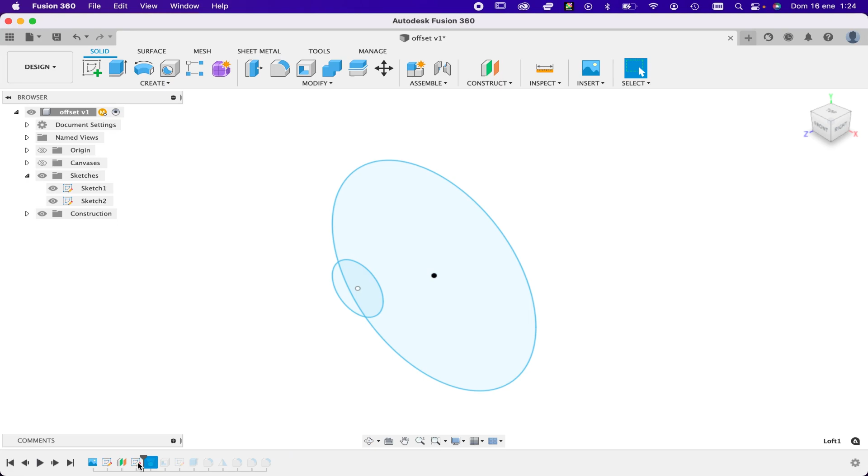I am going to show you the process of how to design a jewelry piece from start to finish. Together, we are going to create a 3D pendant using parametric computer design software. If you would like to follow along, first, you will need to install Autodesk Fusion 360 in your computer from the Autodesk website. I will be using Fusion 360 because, compared to other similar CAD software, I believe that it is relatively easy to use once one has some basic understanding of the program's different menus and tools.

Ideally, you should be familiar with basic technical drawing concepts, but I will try to keep the tutorial as simple as possible, so anybody can comfortably keep up by pausing the video when required. So, without any further ado, let's get started.

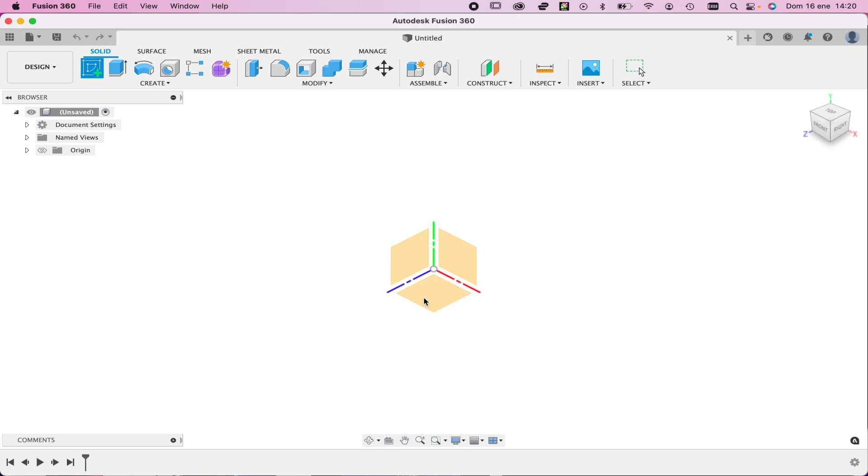When you first open Fusion 360, you find that the different program's capabilities are logically grouped into purpose-driven workspaces. Essentially, we will create a 2D sketch in a parametric canvas, using the tools contained in the Sketch Contextual tab, and then, we will extrude the final resulting geometry. The term parametric meaning that our shape will have a value for each dimension.

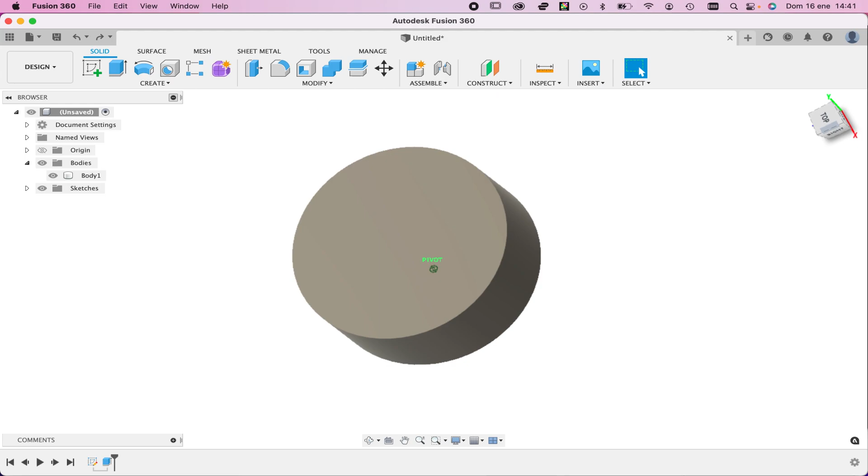Initially, we are presented with a bird's eye view of the canvas, just as if we were about to draw on a sheet of paper. But, Fusion is a 3D program, and we can always orbit in the 3D space by left-clicking and dragging the view cube located on the upper right side of the canvas.

Now, let's go briefly away from Fusion. All 3D designs usually start with a 2D sketch drawn on paper. However, I will stay completely digital, and I will use the Procreate app to roughly sketch my jewelry design idea on an iPad Pro. Cool, now we can import our sketch into Fusion as a reference for our design.

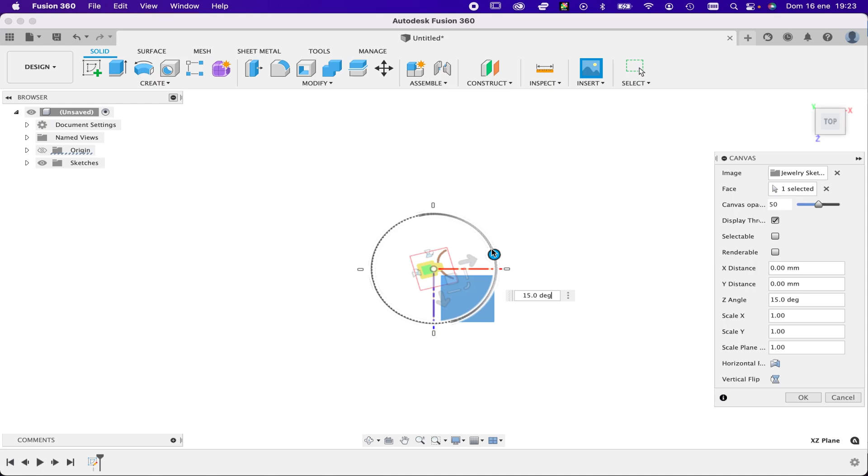Under the Insert drop-down menu, first, we select Canvas, then, Insert from my computer, and finally we look for our drawing in the location where we previously had stored it. Once our drawing appears on the canvas, we must stick it to one of the three reference planes and rotate it to be upright, so it looks much better.

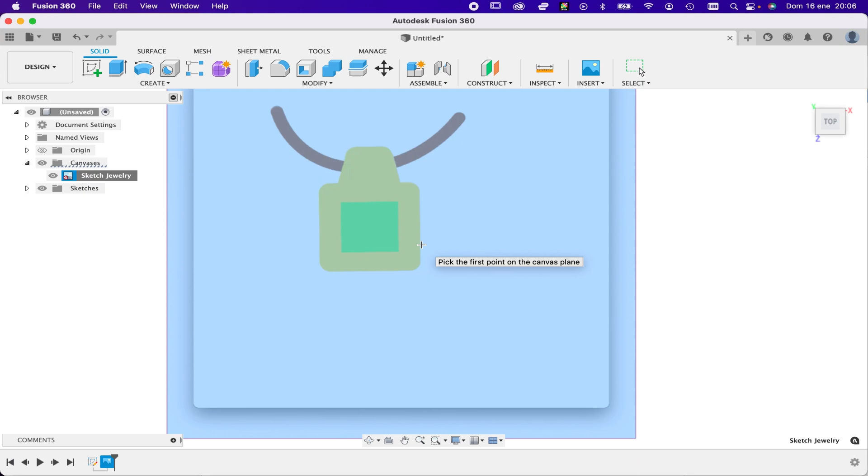Next, we are going to calibrate our drawing, so once we are ready to start building lines, each one of them will be an exact mathematical replica of our original design. On the browser, at the left of the screen, we need to look for the reference file that we just uploaded a while ago and right-click on it, to reveal the Calibrate option in the drop-down menu.

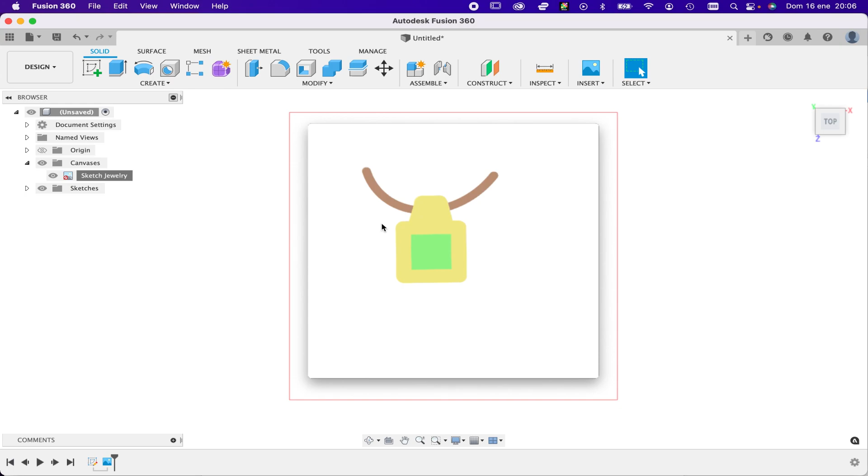You can zoom in as much as you like, to help you place the two crosses precisely on both ends of your drawing. We only must type the desired length of the piece in millimeters, which in our case is 25. I am not happy with the placement of my reference drawing, so I am going to revisit the browser, and this time edit the image, sliding it to the center of the canvas.

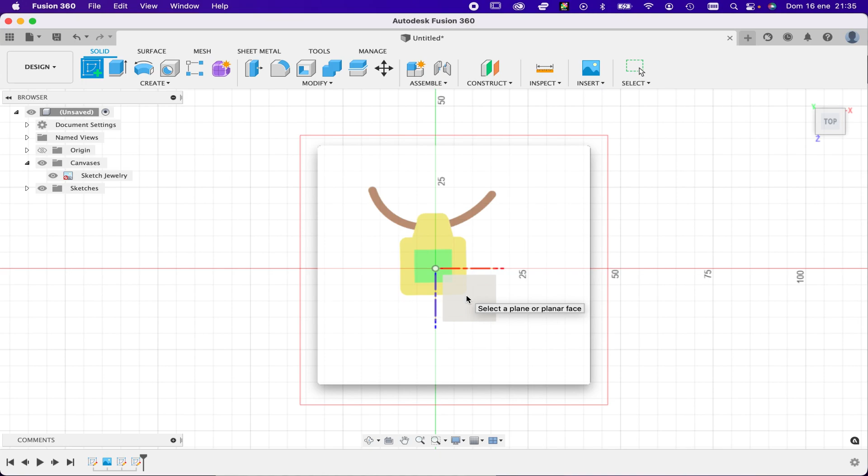Finally, we are ready to start our sketch in Fusion. We click on the Create menu and click again on Create Sketch from the drop-down menu. Next, we need to select the plane which is oriented in the same way as our reference drawing, which incidentally happens to be the XZ plane.

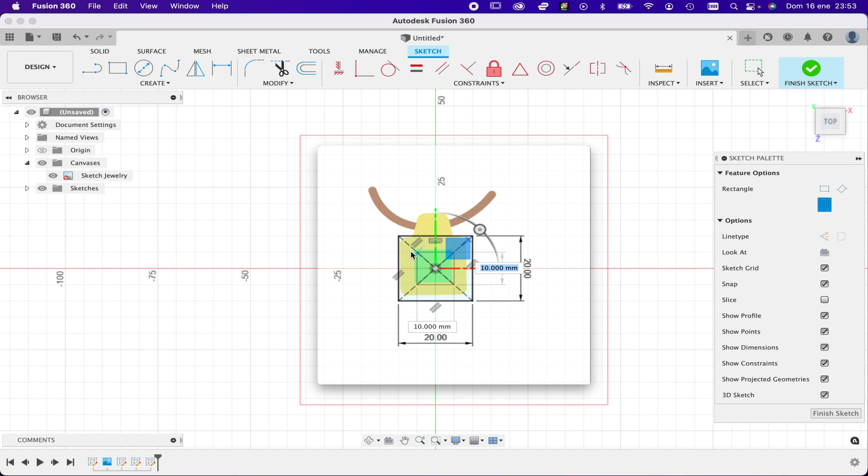We select the Rectangle tool, and the center rectangle. We click on the center of the canvas and drag until we see forming a 20 mm perfect square. We press the Enter key to accept the square. Now, to complete the frame, we must repeat the previous operation. Although, this time, creating a 10 mm square.

Next, we will select the Line tool from the Create menu and we will draw a vertical line from the center of the canvas of any length. Press Enter to accept the line and right away click on it, to select it. With the vertical line selected, press the X key to transform it into a construction dashed line that soon will be our symmetry line.

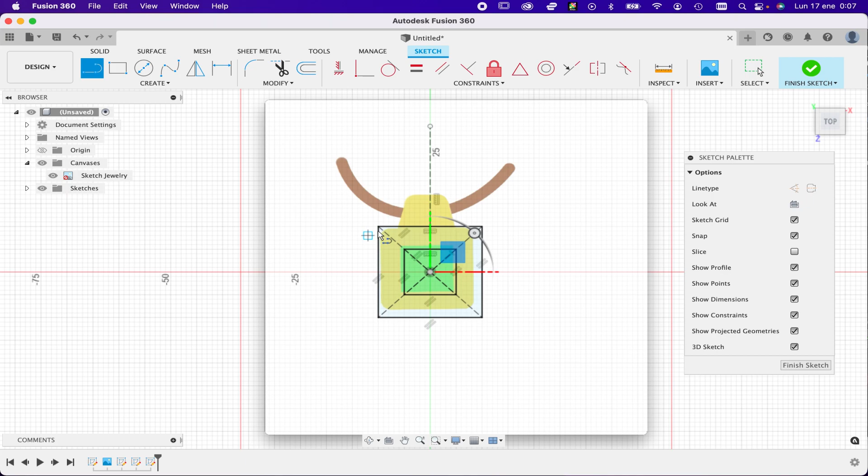Press the key L, shortcut for the Line tool, and draw two more lines overlapping the upper part of your reference drawing. You can type any dimension with your keyboard, and swap between length and angle by pressing the Tab key. I am choosing 7 mm and 15 degrees.

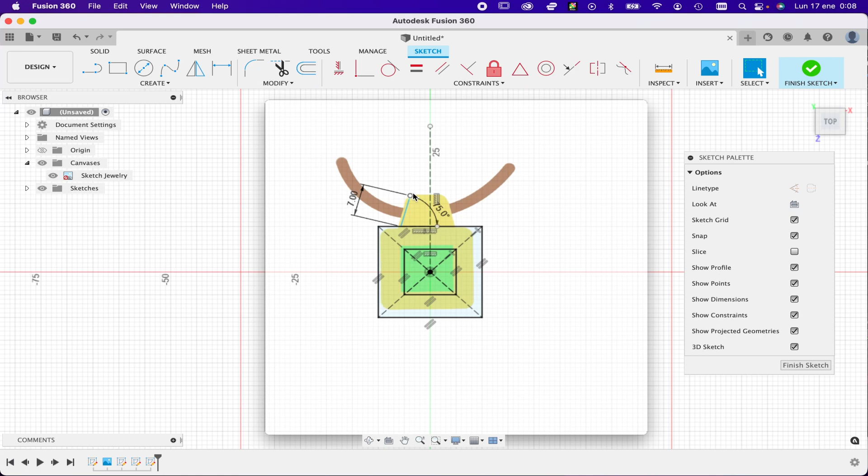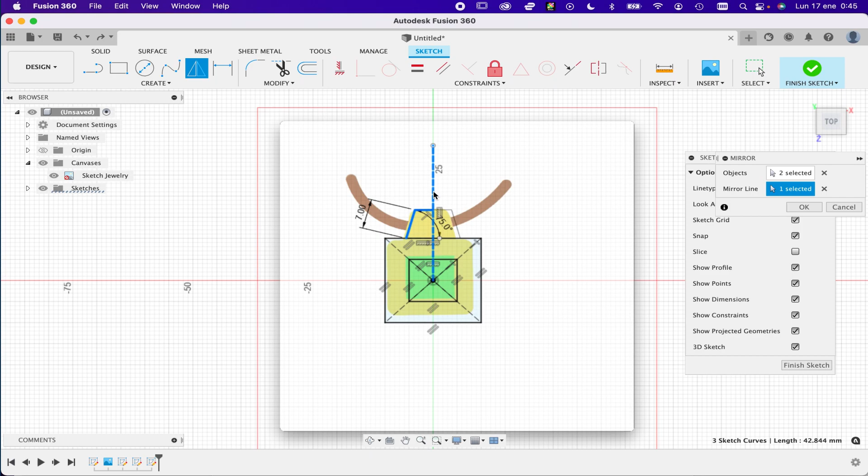From the Create menu, select Mirror to show the Mirror Contextual menu. Select the two lines to be reflected, and the vertical dashed line, as the symmetry line.

We no longer need our reference drawing, so we can disable its visibility on the browser. Click on Finish Sketch to exit the sketching mode and press letter E, shortcut for Extrude.

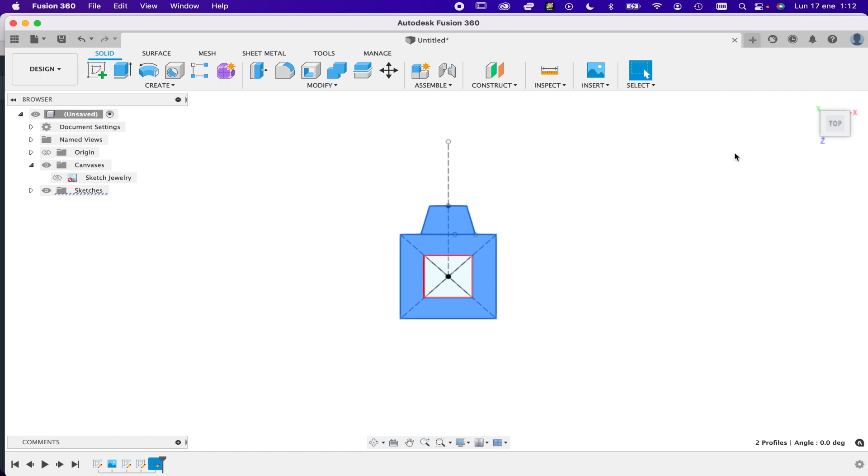While pressing the Shift key, click to select the two areas that you would like to extrude. You can either pull the arrow or type your desired dimension for width. Congratulations, you just made your first 3D body.

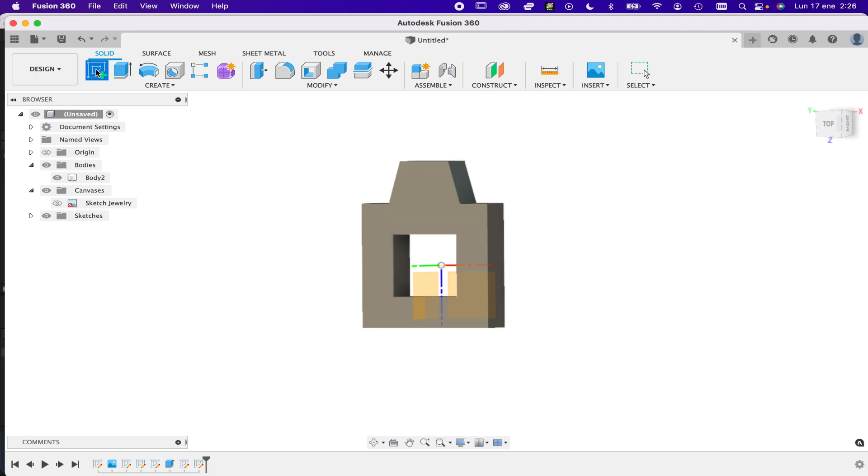However, we are far from done yet. Our award-winning piece still needs a hole for the cord to pass through.

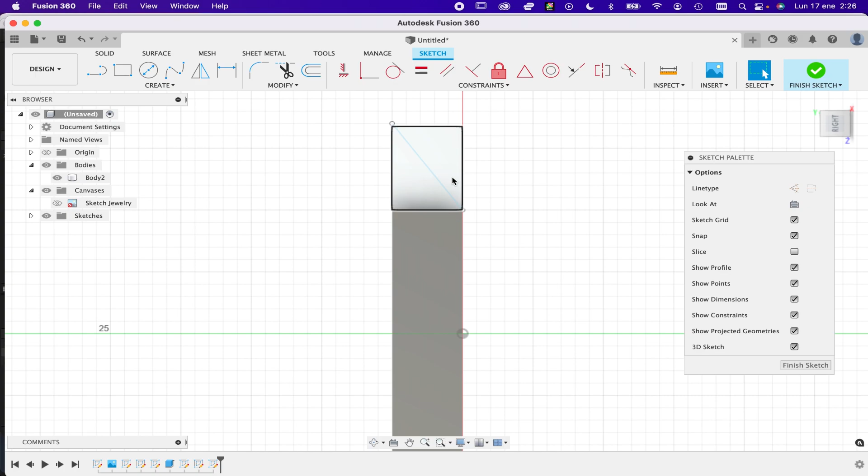This time, click on the Create Sketch symbol and select the Y and Z plane, which by the way, is also the one formed by the green and blue lines. Choose the right view on the view cube, and press L for the line tool. Draw two lines joining the opposite corners of the upper part to find its center.

From the Create menu, select Circle and Center Diameter Circle, or alternatively, press the letter C as a shortcut. Click and type 4 as the diameter of the circle.

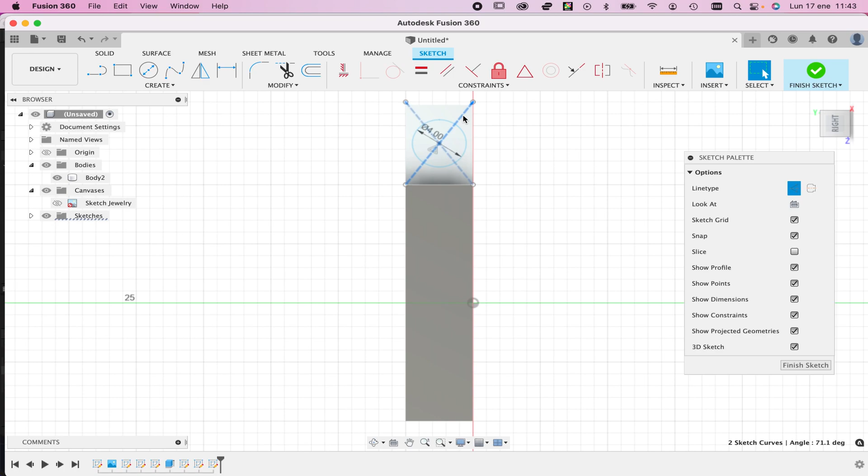Remember, as a good practice, we can always make construction lines from just reference lines, like the two diagonals, by selecting them and pressing the letter X. Press Finish Sketch, and letter E for Extrude.

Now, we are going to remove some material from our piece. Let's move slightly the view cube, so we can see better what we are about to do.

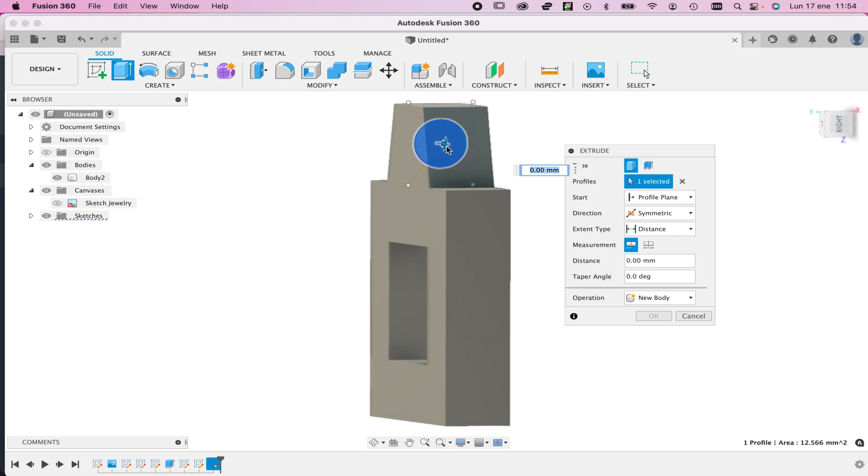Go to the Extrude Contextual menu and select the Symmetric option under the Direction field. Now, click to select in blue the 4mm circle and pull the arrow to perform a complete cut from side to side. It's looking good.

But 3D printers don't like right angles. Therefore, we are going to make round all the outer edges by applying fillets to them. Under the Modify drop-down menu, choose the Fillet option.

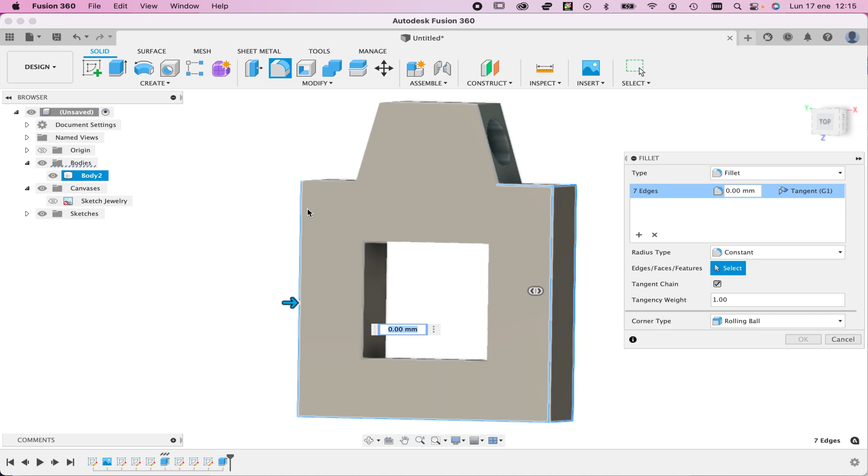You may have to reposition the view cube a few times, to patiently be able to select, one by one, all the edges, a total of 22. There are better ways to perform this operation, but I just want you to practice what we have learned so far. When you are done, type a radius of 0.6 mm and hit OK to accept the changes.

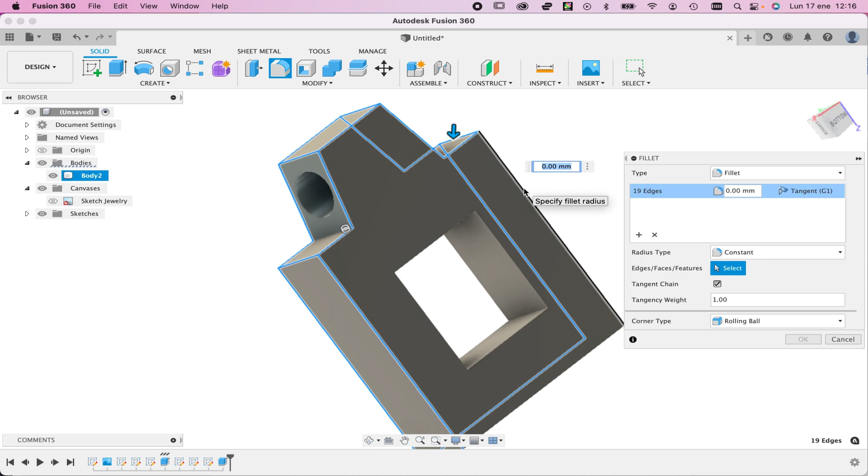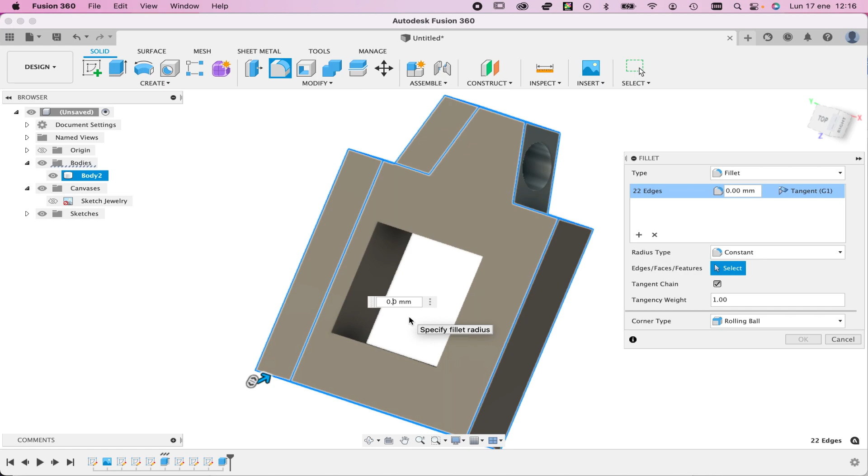We are nearly done. We could export our piece already in an STL file format to be 3D printed. However, that process is not part of this tutorial. Instead, we are going to simulate the complete piece with the center stone and render a photorealistic view of our final work.

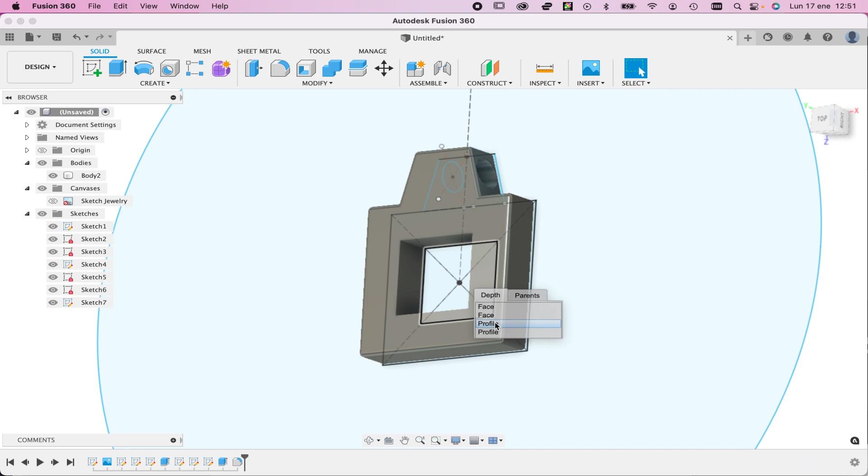On the browser, go to Sketches, and turn on the visibility of all of them. Hover your cursor over the profile of the smaller inner square and click on it to select it. Press the letter E for Extrude and pull the arrow to a distance of 5 mm to match the width

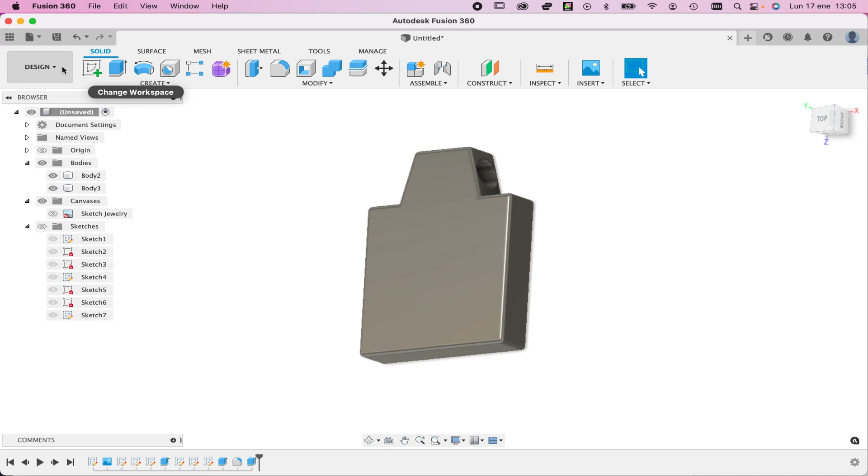of the main piece. Make sure that you select New Body on the Operation field of the contextual menu before clicking OK. Before we continue, turn off the visibility of all the sketches. The next step is to select Render from the Workspace menu at the upper left corner.

We are going to apply some materials to our piece. Click on the multicolor disk symbol to bring the Appearance contextual menu, and search the program's library for gold. Once you find the desired material, just drag and drop it on top of our main piece.

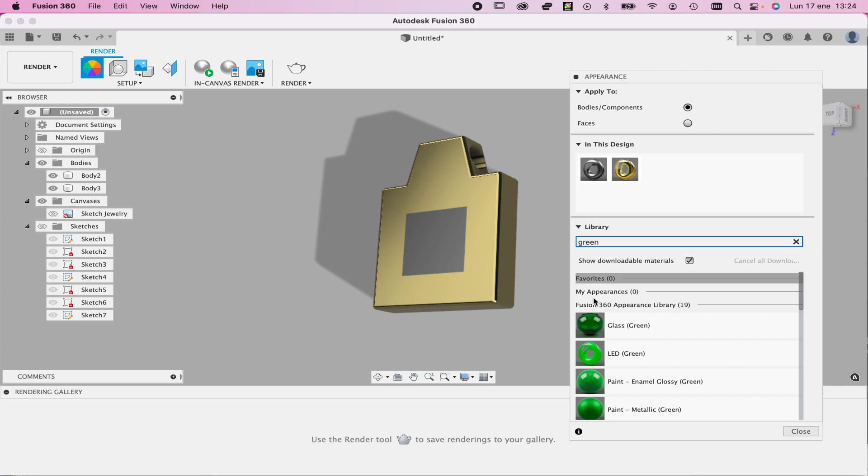Repeat the previous operation for the center stone, but this time, search for green glass as the desired material. The last step is to click on In Canvas Render to have a good idea of how exactly our jewelry piece is going to look once it's manufactured.